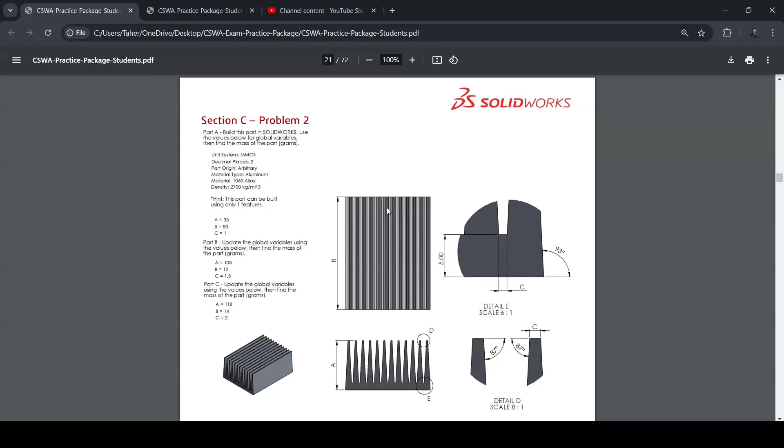Problem 2, section C. Let's go to Solidworks. Let's first put the global variables. A is 35, B is 80, C is 1.

Apply the material, aluminium 1060 alloy, and add the mass property sensor. Now let's start sketching on the front plane. To create a profile, just make one of the teeth first.

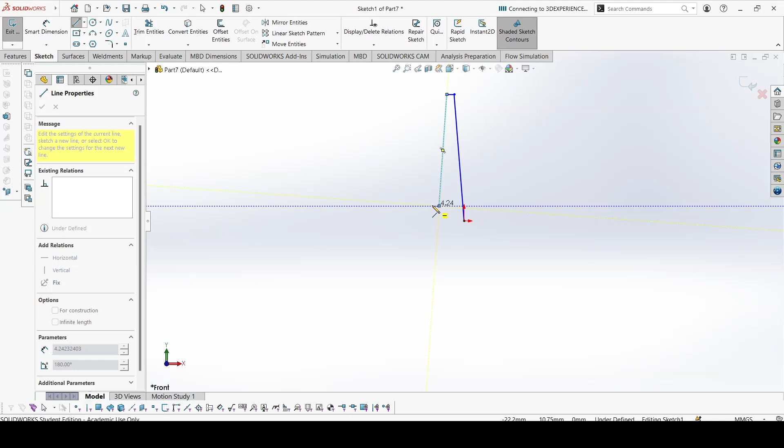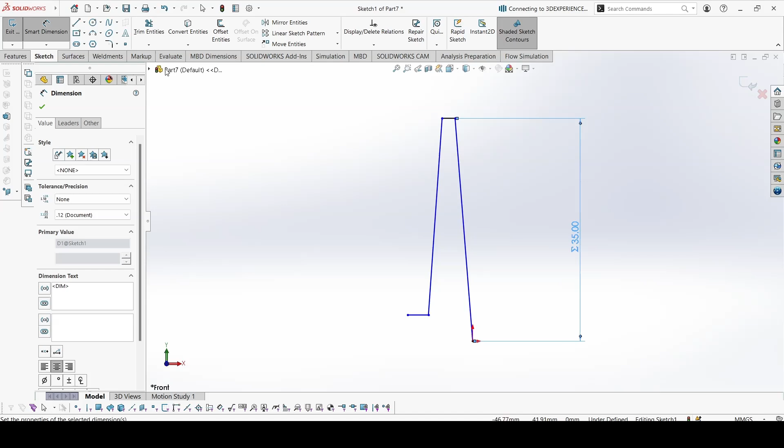The dimensions, this one is equal to A, we'll put equals to A. You can make a center line here to add the angles. This angle is 93, and this would also be 93. 180 minus 87.

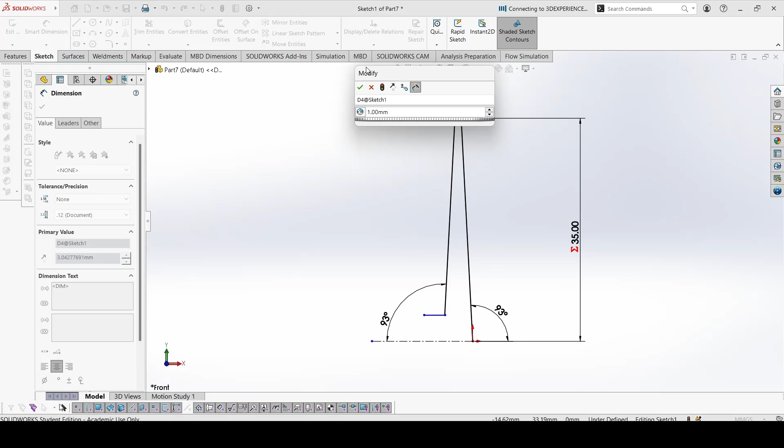This is equal to C. Also this is equal to C. And this distance is 5. This is done.

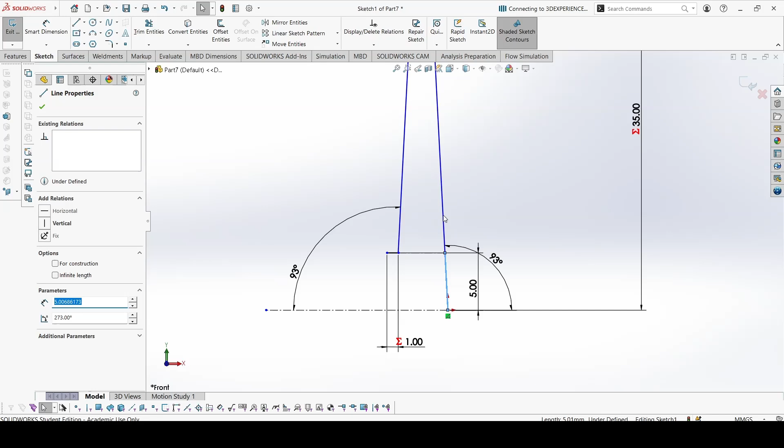Now we have to pattern these lines, but not this extended line. So we can take a center line over here. To cut this line into two, we can just trim it once and add another line. Then select these both lines, pressing shift key, and make collinear. Now everything is constrained. Let's select these three lines and this one.

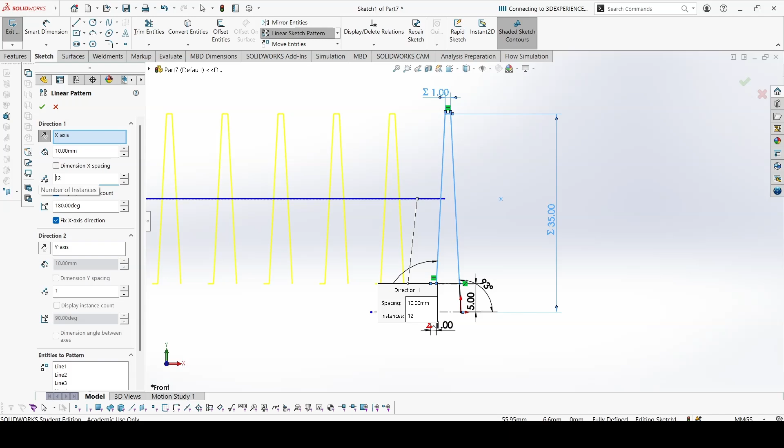Now go to linear sketch pattern, change the direction, and we need 12 of these. Okay, press enter. Now to join these, we can just drag this point over here, put it there, and it is constrained. Now trim this last edge

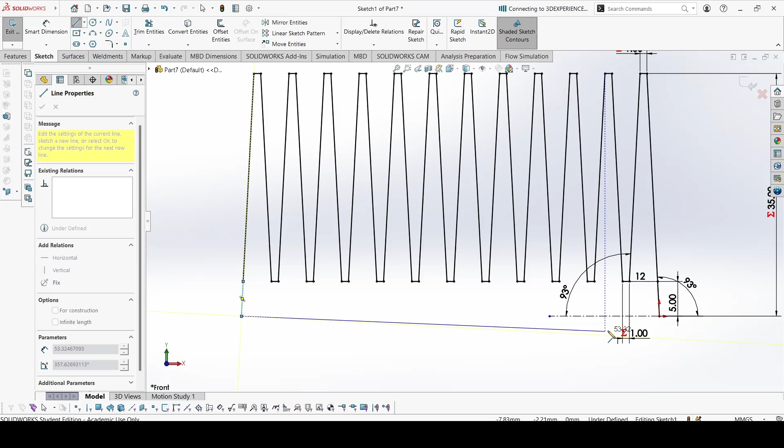and extend this, and finally till here to close the sketch. The sketch is complete, everything is constrained. Now let's go to extrude. This would be equal to B.

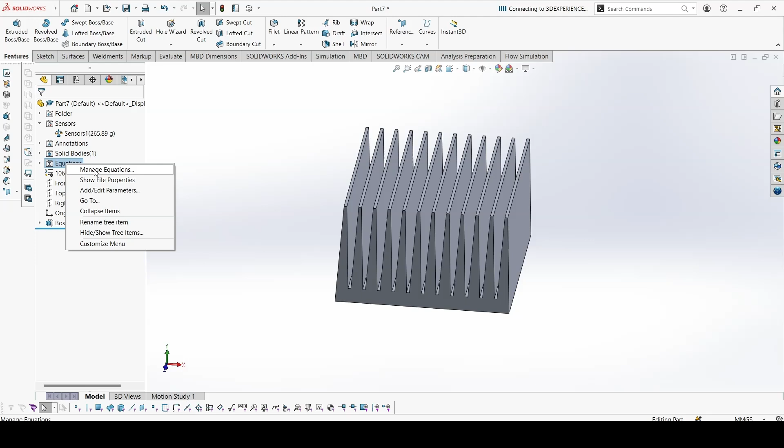And the model is completed. Let's check the mass, 265.89 and 265.89. So yes, this is correct. Now for the second part, the equations. This is 108. This is 12. And this is 1.5.

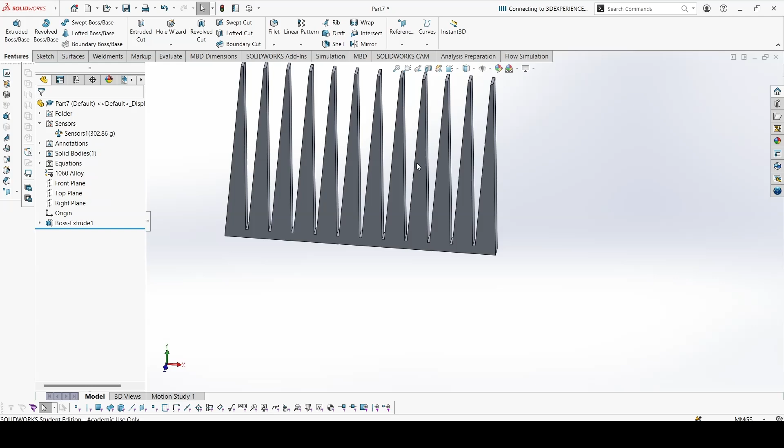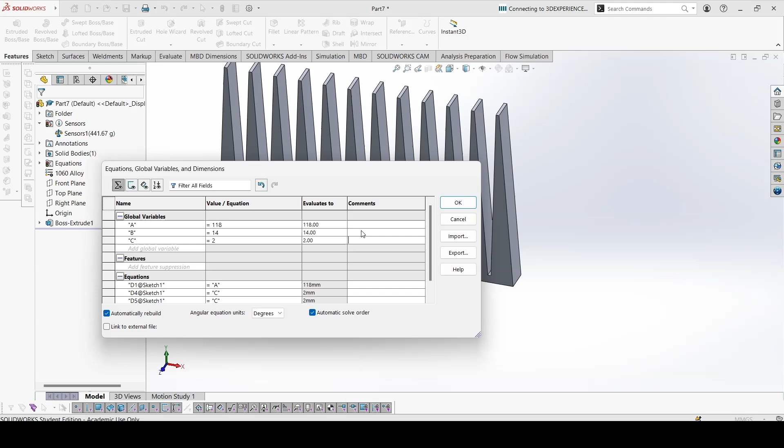The answers in the PDF would not match with these. Those answers are wrong, so you can check with my answers here. This is 302.86, and also for the third part, this is 118, this is 14, and this is 2. So you can check with my answer, that is 441.67. So this is it. Problem 2 is completed here.